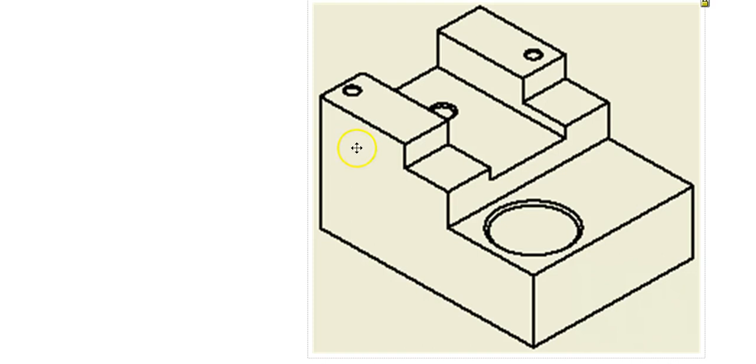So I'm looking at it in 3D, but it doesn't always give the best look to understand the shape of a part. So a multi-view drawing takes this 3D isometric and projects it orthographically, creating a front view, a top view, and a right side view. I'll show you what I mean.

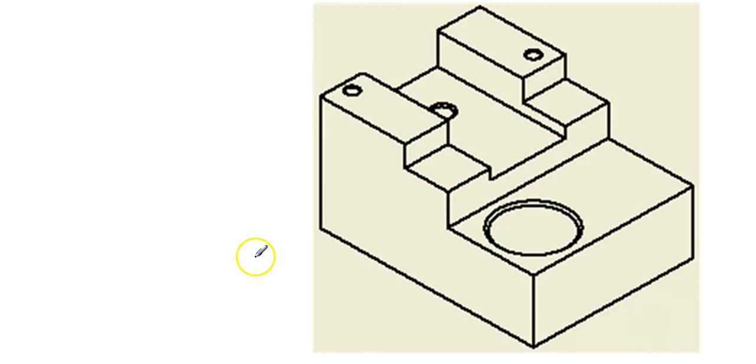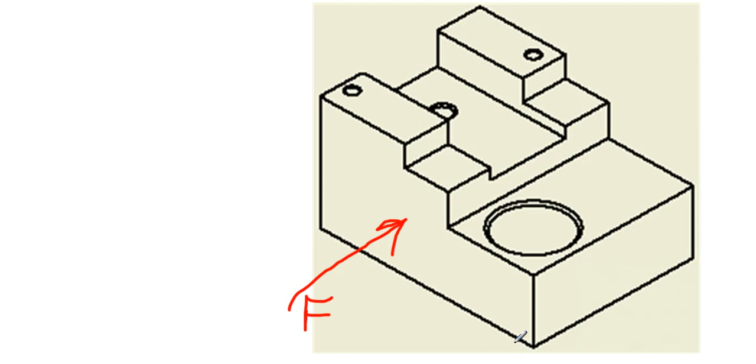So I take my look at this, and you always are going to look this way to be the front view. It's the longest from left to right. It's showing me the most shape. And when you do these drawings, you always want to see the most shape in the front view. You don't want to see a bunch of hidden lines.

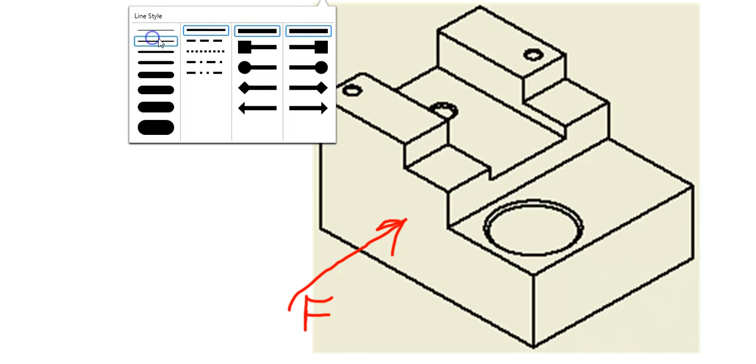So that would be my front view. So basically, for a front view, I'm going to see what looks like—let me make these a little bit smaller—this outside shape. I'm going to follow this right around. When I'm looking directly at this front side, this is what I'm going to see.

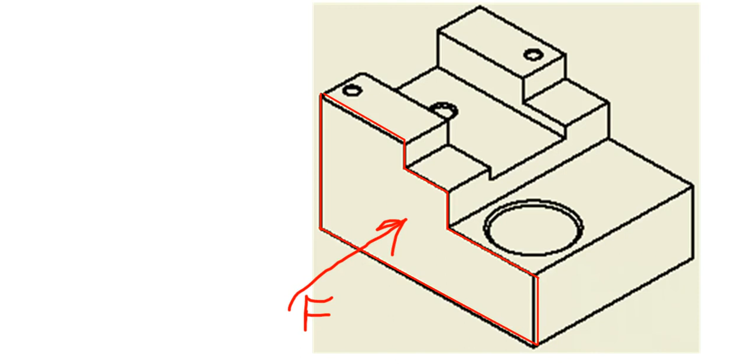I'll show you what I mean. So here's my front view. Now, these dashed lines are called hidden lines. So if I can't see it because it's a solid piece of metal...

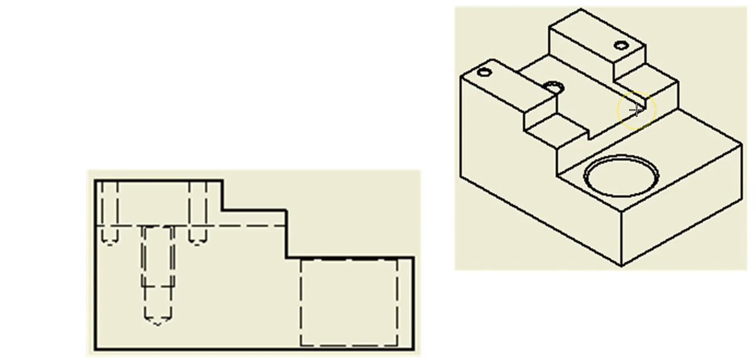And there's other lines that I should see inside—think about it as if it is made out of glass. If this front face here that we just drew was made out of glass, would I see these lines inside of it? And the answer is yes.

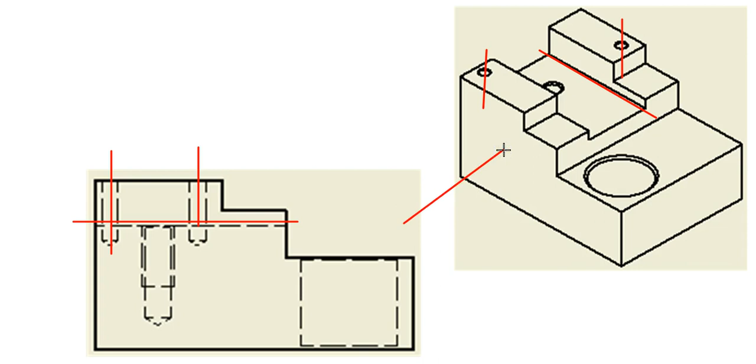This line that goes right across here is this line right there. And these dashed lines for these holes right here is this one right there, and this one would be right here if I was looking again directly from this side. So this is always the front.

Then I would next look at the top. Well, I like to say, hey, pretend you're standing in the front and you climb up a ladder and then you look down. That's the orientation I would see.

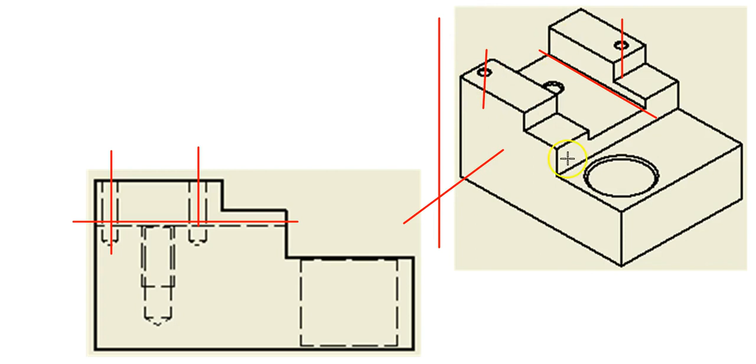So here's my standing in front, looking down with the ladder. This is what I see on the top. So this section right here is this section right here. This one right here is this one right here. I think you see what I'm saying. So this one right there would be this one right here.

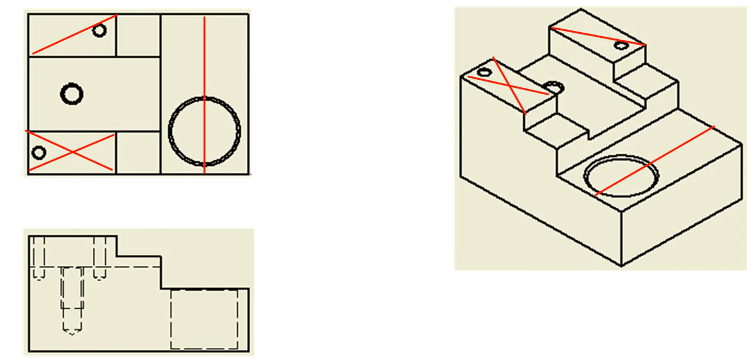Okay, now there's some important things here that I need you to see. Get rid of those lines. This is really important to help you understand information from one view to the other, and that is the views line up.

So this outside line lines right up there. This outside line lines straight up there. This little step lines straight up there. And so we go.

The center of this hole is going to be the center of this hole. Well, you can see I'm off a little bit. Let me see if I can fix that. Come on, move it over. It's not wanting to let me move it over, so let me just get rid of that, and I'll draw you a better line. So right here, I'll go from the center, straight down. There you go. Makes a little bit more sense, right?

So all of this information is transferring. So if this is the center of the hole, then these dashed lines are the side. I'm transferring this information from one view to the other, and since this is inside the part, they have to be dashed lines. The point I want you to see is that all these lines transfer. So whenever you look at a print and you're not sure what these lines are, you will be able to transfer, draw a straight line, and see, oh, that's what that is.

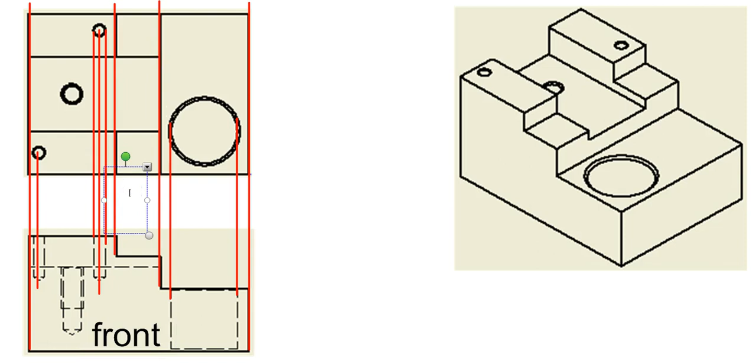So now I have my front view, now I have the top view. This one here is always the front. This one here is always the top. That never changes. So we have a view over here from this side.

Looking from this side, directly this way, looking at that side, is from the right side. So I'm looking from this side.

And if I'm looking from this side, what I really see is this rectangle, and then I see this other shape right here. It's a rectangle with a little notch in it. And then I see these other rectangles.

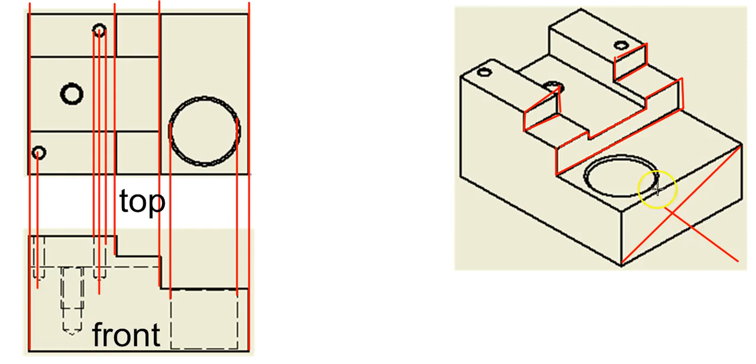I'm not following my lines too good, but I think you get the point. Looking straight from this side here, I'm going to see a couple of rectangles on top of this, on top of that. And that's all I'm going to see for that view.

So here we have this. We create the right side view. What do you think it looks like?

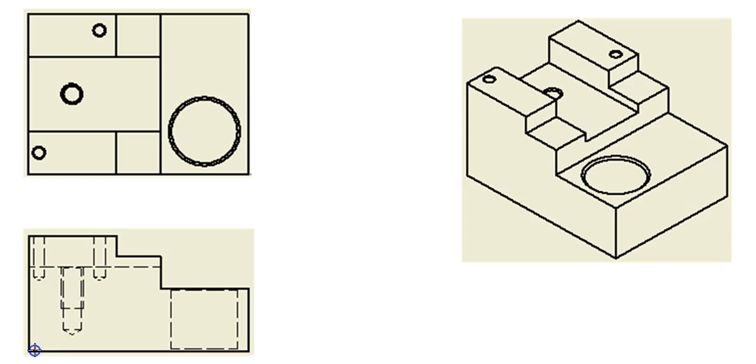Well, let me give you some clues. The bottom's going to be here. The top's going to be here. The next line's here. The next line's here. So those are some definite things to help.

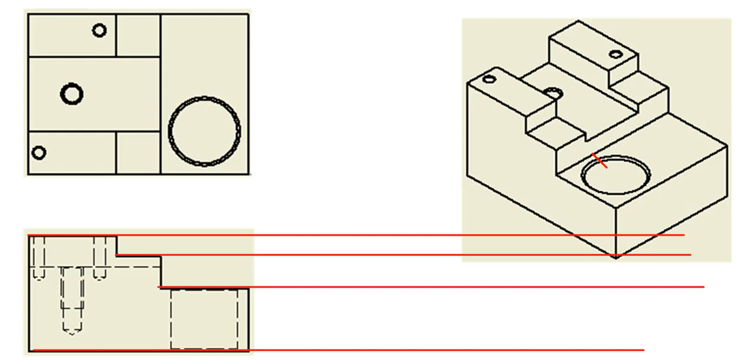Okay, now there is a process to help you understand this, and let me show you. Let's move this thing way out of the way here. I don't want to throw it away, but let's move it.

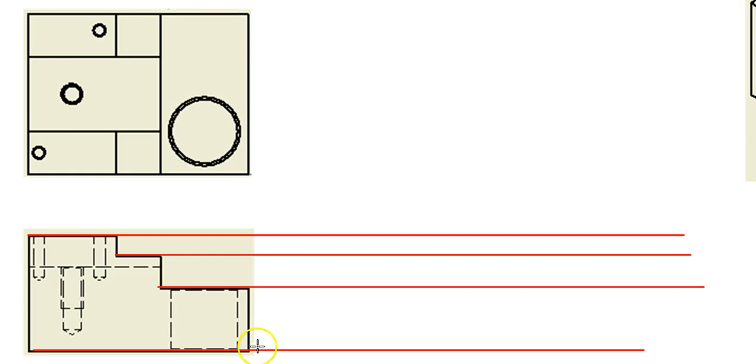So there's a process that calls for - if I line up my lines like this, and let me extend these out.

And if I decide I'm going to say I want this much space on my view, I'm going to draw a line straight up and down this way.

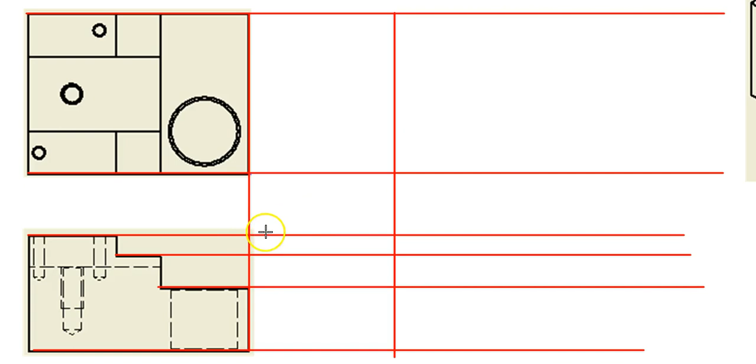And if I go from this corner at a 45-degree angle, that looks like 45, and I transfer this over like this line is a mirror. So let me get rid of this line here because I drew it in the wrong order.

If I make this like this thing is a mirror, it reflects - this intersection would be where my line comes down. And if this goes to here, this would come down. Now this must not be 45 degrees because otherwise our part wouldn't be so wide.

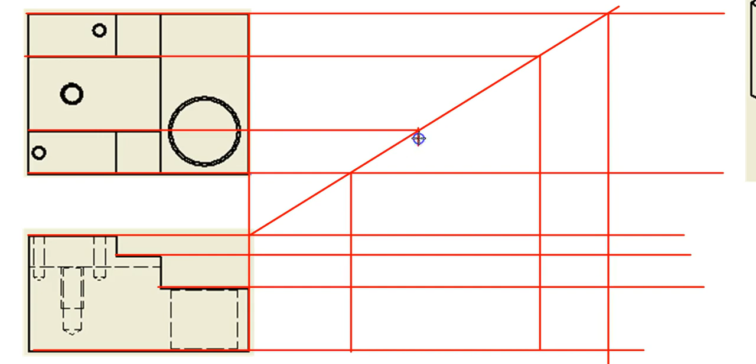So let me just give you the idea. If this goes to this line and then comes straight down, and this goes - see, it's much easier when you have graph paper to do this on. So this would be the inner ones, these would be the outer ones connected with these lines.

Okay, and then I can - I'm going to pick a different color so that you can see this. I'll use black. So let's draw this shape. That's the full width.

There's that. And then this shape here is right here. Oh, look, I forgot that line. Let me change my color back to red.

If I were to extend this line across here, back to black, then you would see I have this little notch down, just like I was telling you on the last slide.

There's the middle section. Now we have this upper section, and I know it's just this little area here. So I'd extend this up. And there it is. So let me show you on the next slide what it really looks like.

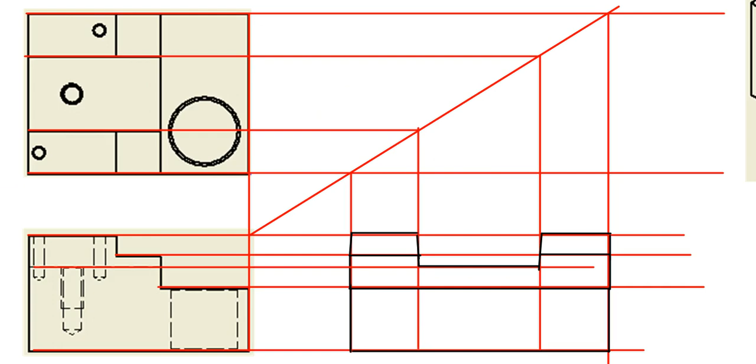Okay, so there it is. So here's my edge, there's my notch in the center, which is this notch in the center here. So this should kind of give you an idea of how the views flip.

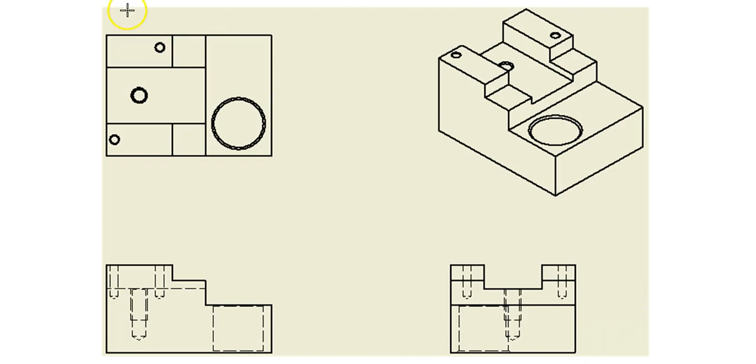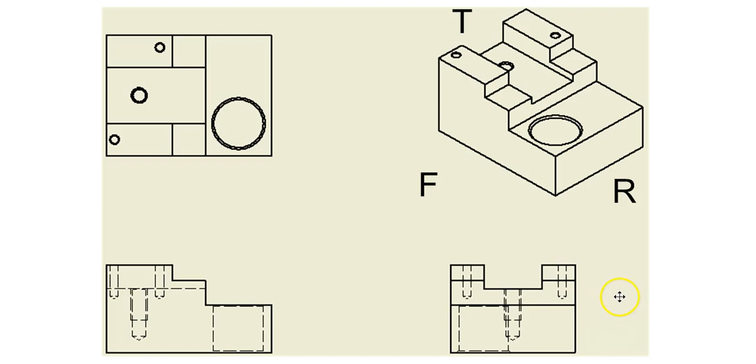And they flip by this being the front, and over here being the right side, and up here is the top view. Looking down from the front. All right, so that should be a fairly decent introduction to multi-view drawings.

And we will get further into blueprint reading in the next video.